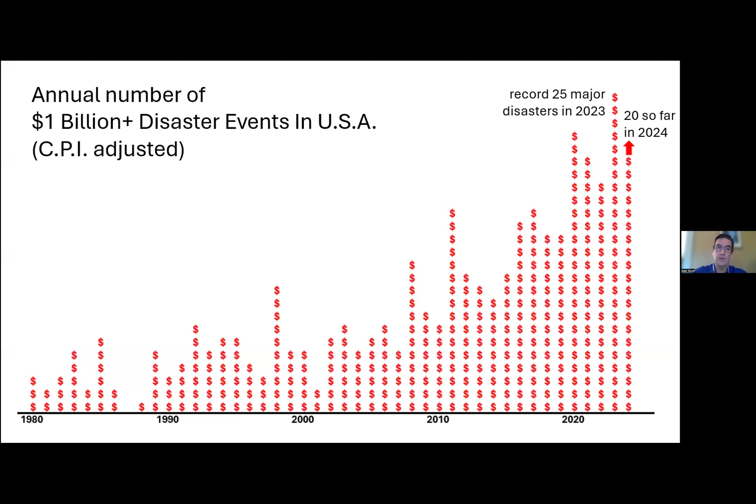Kind of addressing this, many of you may remember in 2019, the AIA announced their climate action plan, which reinforced the commitment that architects should have towards sustainability and resilience, and talking about the necessity of designing for the effects of climate change. And so this is very much part of our responsibility, our professional responsibility as architects.

One of the things that people often get confused by is code. Building code is not the same thing as resilience. I think about building codes the way I think about the frames on modern automobiles. They are designed with crumple zones in the frame so that in a collision, that frame absorbs the impact of the collision, sparing the occupants the worst of the impact.

But afterwards, the occupants hopefully will walk away or only sustain minor injuries, but the car is totaled and needs to be replaced. And so code is a minimum life safety standard, not necessarily focused on resilience to the ability to continue operating after hazard events.

When I think about resilience, I think about it in sort of three aspects that are important in buildings. The bottom line, starting with building safety and security, about keeping occupants safe during and immediately after a hazard event. So building codes do some of this, but not necessarily far enough relative to all hazard types.

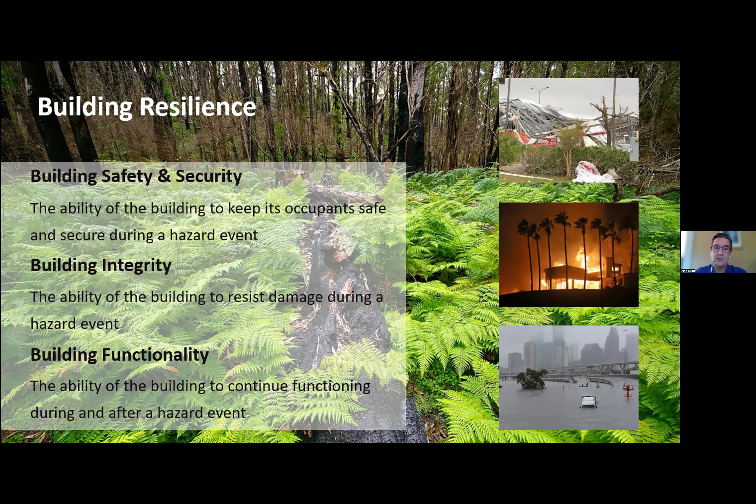Investing in resilience pays. The National Institute of Building Sciences estimates that for every dollar invested in resilience, you save $4 to $11 or more after a hazard event in terms of avoided losses. So there is a return on investment from thinking upfront about making resilience measures in our built environment. And that's both public investment in infrastructure and community, as well as individual investments in individual buildings.

The other thing that I think is important to note, although it hasn't necessarily filtered down to conversations that we have with individual clients, there are significant trends happening that are going to be pushing all of us to be thinking about resilience in the built environment, if not now, in the near future. Banks are beginning to look at resilience risks associated with projects that they lend on. Insurance companies are beginning to look at not just blanket regional hazard estimates, but individual properties in terms of their risk, in terms of whether or not they underwrite insurance for those properties, or how much that insurance will cost.

And maybe most importantly, real estate financial investors are beginning to look at the long-term risks associated with their investments in commercial real estate relative to the impacts of natural hazards and climate change. And so the ability to get projects funded and insured is going to be dependent upon how resilient they are, or what the risks are associated with particular properties and particular locations.

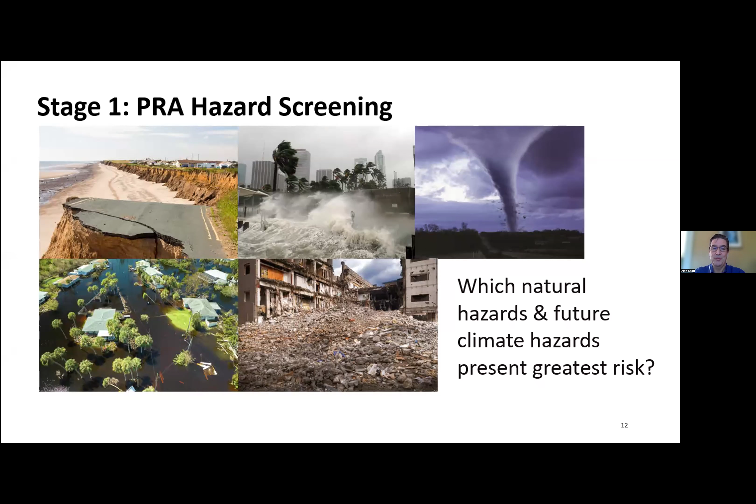I understand that we have actually the opposite thing happening here in the Pacific Northwest. The Cascadia subduction zone, which Jay talked about last week, is actually causing the Oregon coast to rise more or less at the rate that sea level rise is happening. So until that big earthquake happens, we might stay ahead of sea level rise here, but we're going to be in trouble with the subsidence after the earthquake happens.

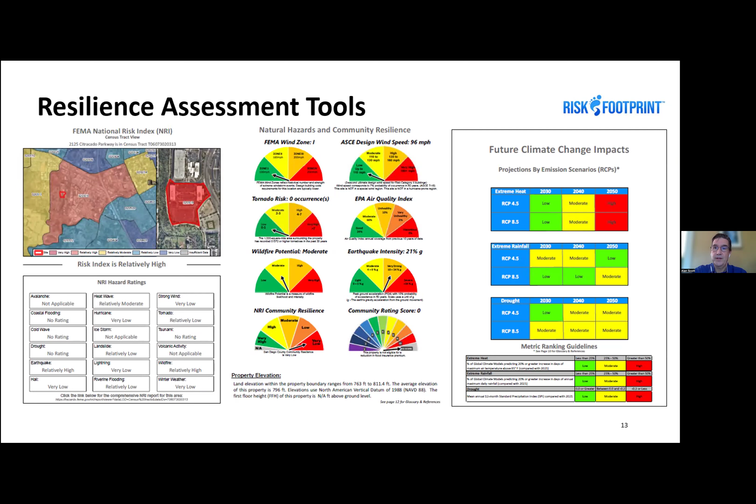When doing that hazard screening, there are publicly available tools like FEMA's National Risk Index and other resources to help with those assessments. And there are also some proprietary tools that help put it all together. And so that assessment looks at qualitatively what are the high, moderate, and low hazard risks of different current hazards, and also uses climate models through the representative concentration pathways for carbon emissions to determine potential for things like extreme heat, rainfall, drought, and sea level rise.

The second stage of that assessment looks at vulnerability, and so vulnerability combined with the frequency and intensity of potential hazards is how you figure out the risk associated with those hazards for a specific location. When we look at vulnerability, we look at the vulnerability of both the asset and the occupants of the building, and not just the building itself. And the factors that go into that include exposure, sensitivity, and adaptive capacity. And just to quickly dig into what those terms mean.

Exposure is what it sounds like. How exposed is that particular location, the building or site, to the identified hazards? And an easy example of this is that a waterfront property has greater exposure to a hurricane than one that's located a mile inland. So that changes the exposure. And interestingly, when we think about sensitivity and adaptive capacity, that has more to do with the type of facility we're talking about and the occupants who will be in that facility.

And a quick way to contrast that is thinking about maybe your own architecture firm. If you have your critical project documents saved on the cloud or in an offsite location, and your staff is able to work remote on laptops, then if there's a hazard that affects your office, you can adapt and continue operating effectively elsewhere while the building is repaired.

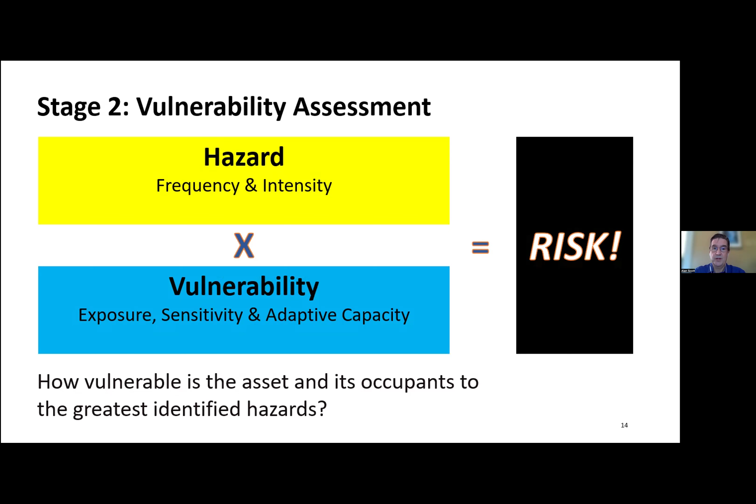The third stage of that assessment is looking at risk mitigation. So identifying of the given hazards and the vulnerability to those hazards, the risks associated with those, what are the physical and operational measures that can be put in place to reduce those risks?

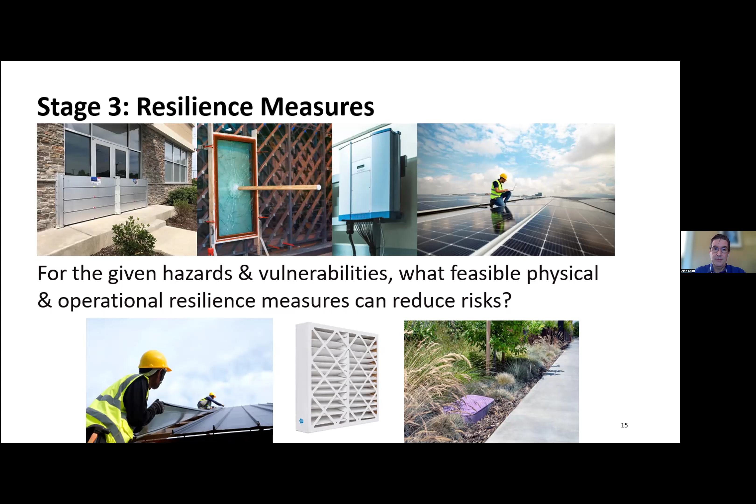And that could be things like flood barriers that can be deployed, impact-resistant glazing in high wind events, having a photovoltaic system and battery backup for backup power, so that you have some continuity of operation, installing more wind-resistant roofing to prevent the severe losses from roof blowing off, having high efficiency filters to take care of wildfire smoke, or simple things like drought tolerant landscaping and water efficient fixtures, so that in a water shortage scenario there's resilience there.

One critical consideration about resilience is that it goes hand in hand with sustainability. So sustainability and resilience are two sides of one coin. Sometimes in the ESG space, this is referred to as double materiality. So when we're looking at climate-related risks, we look at transitional risks, which are risks associated with what your building or your business is doing to Mother Nature, and physical risks, what's Mother Nature doing to your building or your business.

And so there's regulatory aspects about transitional risks that need to be addressed, things like building performance standards that are setting caps on the carbon emissions from buildings in certain municipalities. And then physical risks, again, are looking at things like natural hazards and climate change and those impacts on a building.

I mentioned the voluntary standards as well, and I've been working with the U.S. Green Building Council on integrating resilience into LEED version 5, which will be released next year. One of the key elements is that both for LEED operation and maintenance of existing buildings and LEED for new construction, there will be a prerequisite for conducting a resilience assessment in the case of new construction or major renovation prior to developing the project. So identifying the primary hazards that the building will be subjected to, and how those will be addressed in the design of the project. So that's going to be a prerequisite in the new version of LEED.

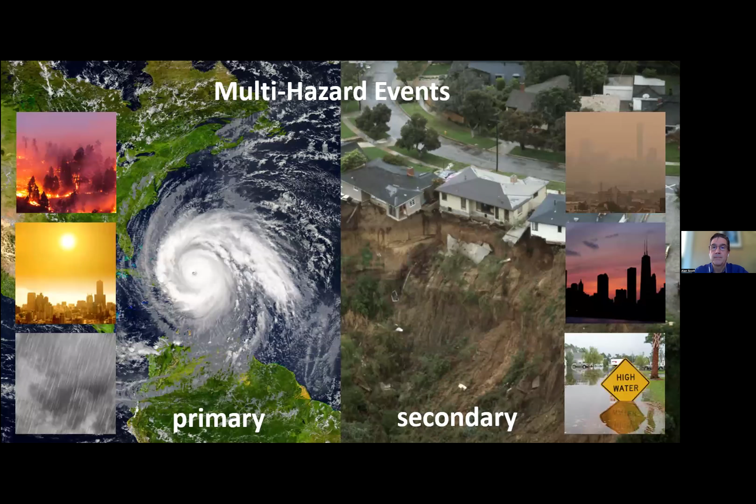Now, starting to talk more specifically about hazards that we need to address with resilience measures, it's important to understand that we're not just talking about one hazard at a time, but in many cases, there are multi-hazard events. So there's a primary hazard and a secondary hazard. A primary hazard like wildfires that affect a specific location, and then wildfire smoke that impacts a much broader area. One thing to note is that secondary and tertiary hazards can be separated spatially and temporally from the initial hazards.

And one interesting example of that came up this year down in New Mexico. 2 years ago, a wildfire in the mountains of northern New Mexico left a burn scar on the hills. This spring, an unusually heavy rainstorm came through and caused mudslides in that burn scar that went into the water supply for Las Vegas, New Mexico. And so because of a wildfire 2 years ago and an extreme rainfall event that you wouldn't think would cause a drought, the city was out of water and had to shut down businesses and was essentially in crisis mode because their water supply was vulnerable and not resilient to those hazards.

Another way to think about that is that hazards are often cascading and compounding from one another. For example, an extreme drought is an acute hazard that we're faced with. Sometimes those droughts occur in conjunction with heat waves. And in those kinds of scenarios, there could be an increased demand for electricity. At the same time, there's reduced water supply, which means that thermal electric plants that rely on water for cooling might need to shut down. That's happened several times in France over the last few years, where they had deadly heat waves because their nuclear plants had to be shut down in the face of a drought and extreme heat event.

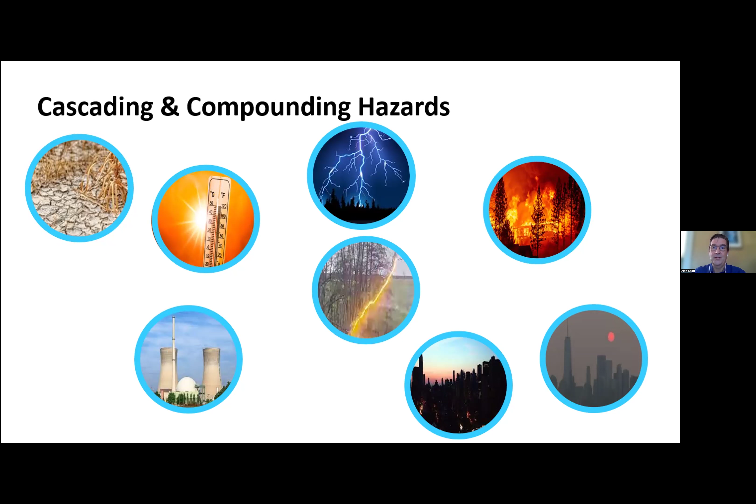Extreme heat events in the summertime can also spawn severe storms with lightning or winds that can knock branches onto power lines, which then spawn wildfires and create wildfire smoke. At the same time, we might have power outages where we can't cool our buildings without opening the windows. So you can see that one hazard can lead to another, and impacts can be widespread and interconnected.

One final note before we dive into the other details: not a day goes by, I don't think, that I hear about our shortage of housing and housing affordability. And so that's a crisis we're dealing with all over the place, including here in the Pacific Northwest.

I don't know whether you saw this study from the Harvard Joint Center for Housing Studies that 41% of our rental housing nationwide is at high risk from climate change impacts. And we can see on this map that there are a lot of areas in Oregon and Washington where that's true. Flooding is one of the key risks associated with that.

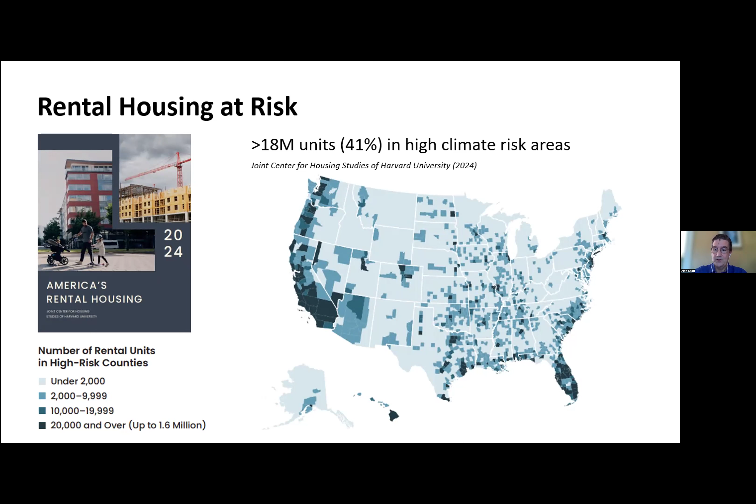So at the same time we're trying to address this housing crisis, climate change might be undermining or eroding, literally and figuratively, our existing housing stock and taking away our ability to address that other issue. So resilient housing is going to be one of the things we need to focus on. So let's talk about water and then wind after that.

And you may or may not know that floods account for 90% of the natural disasters in the US. And overall, flooding is responsible for more of the total damages in terms of loss of life, economic damage, and property loss from natural disasters. And while coastal areas are some of the areas most subject to flooding, significant flooding happens in every state in the United States.

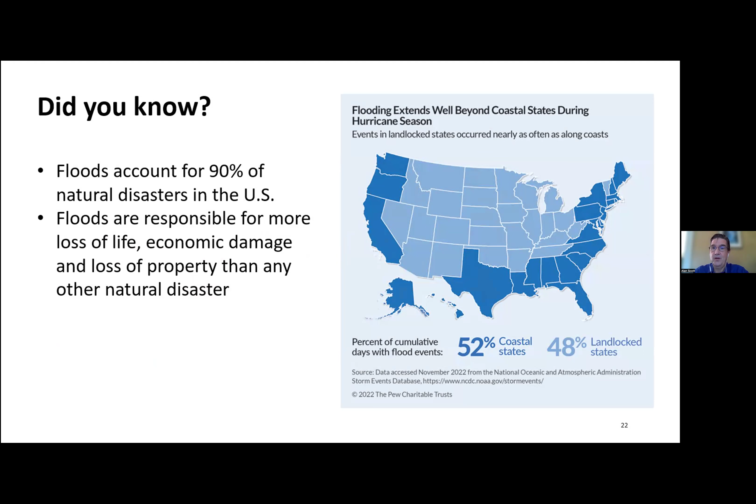Different people have different ways of classifying this, but I want to talk about generally types of flooding. The two main ones that you need to address are fluvial or riverine flooding and pluvial or heavy rainfall flooding. One of the scenarios that's happening more and more down in Florida is sunny day flooding or tidal flooding, where sea level rise and just king tides are pushing tidal water up into drainage systems and causing flooding in streets, even on days when there's no rain around.

And of course, flooding can also come from storm surge from major storms. And wind-driven rain can be a source of flooding in buildings. Back when Hurricane Ida or the remnants of it hit New York City, there were many older buildings that weren't designed for wind-driven driving rain, and there was some significant flooding in buildings in Manhattan and elsewhere in New York from those hurricane remnants.

When we're trying to assess flooding, one of the first places that I think many of us are used to going to is FEMA flood maps. And this is, of course, a good place to start because FEMA is the primary government agency that addresses flooding and helps with identifying risks and helping with recovery. But it's important to note that FEMA flood maps only address riverine or fluvial flooding. They do not address pluvial flooding and the other types of flooding I just mentioned. So you can start with a FEMA flood map, but don't finish with it.

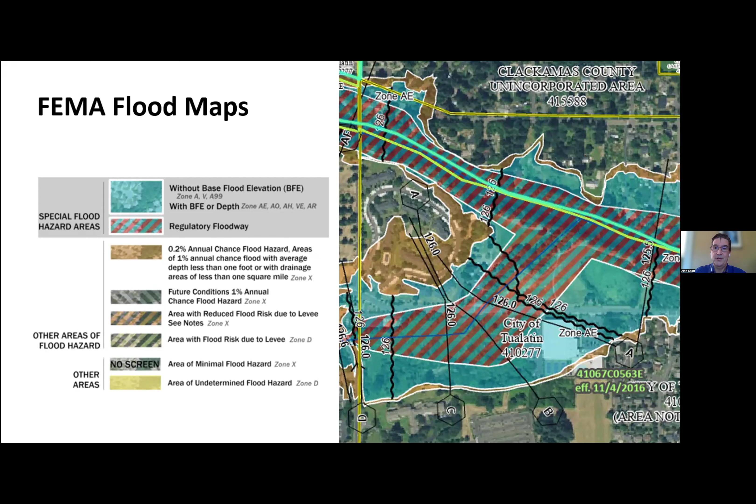And here's just one example of a property. The upper map shows the FEMA flood map showing this particular property in a low flood risk zone. But looking at other resources to understand pluvial flood risks, there's a significant area through the center of the site that has a flooding risk that needs to be addressed in the development.

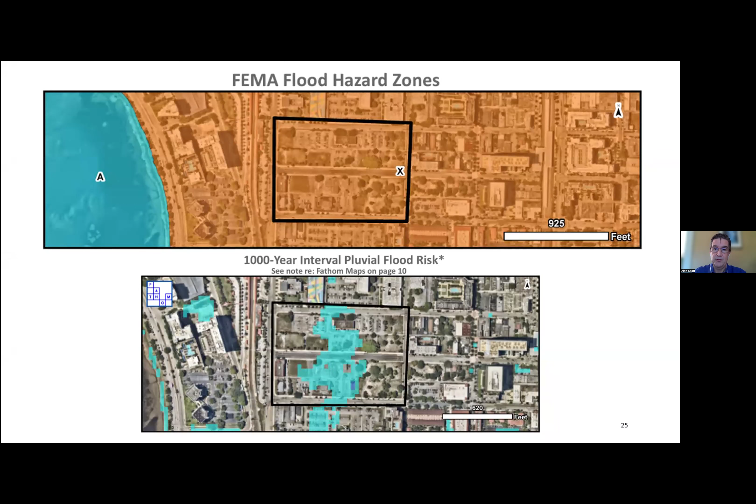The other thing, in terms of terminology around flooding, people often get confused whether it's referring to frequency or probability of an event happening. And this doesn't just include flooding. This can be other storms that are referred to in terms of their return period. So a storm event return period is the recurrence interval. But does a 100-year storm mean that it happens more or less once every 100 years? And that's actually not correct.

It means that there's an approximate 1% annual chance, a probability of an event that exceeds the severity of that particular type of storm. So it's a 1% annual exceedance probability, not to say that if you had a 100-year storm event last year, it's going to be roughly 99 years before the next one happens.

So one way to put this in perspective is that 100-year storm event probability means that there's a 10% chance over a 10-year commercial real estate hold period. So the investor who might be holding that office building for 10 years has a significant chance of flooding occurring or some storm event happening. And over the course of your 30-year mortgage on your home, that's about a 26% chance of that event happening. So it's not insignificant, even though a 100-year event might sound like an unlikely frequency, but it's actually significant.

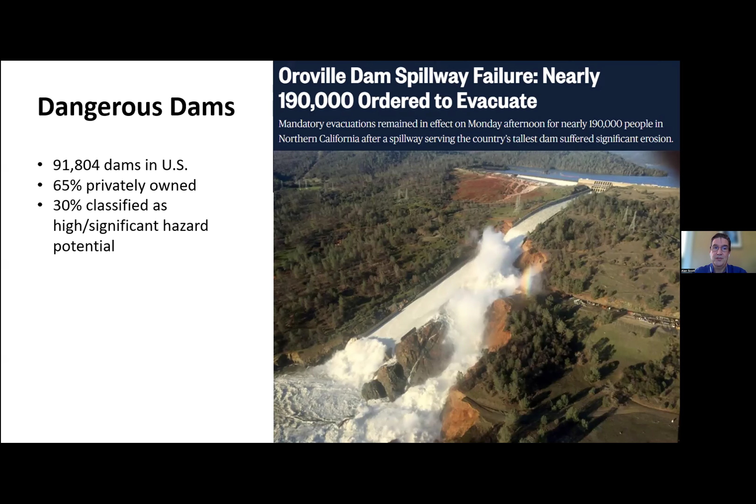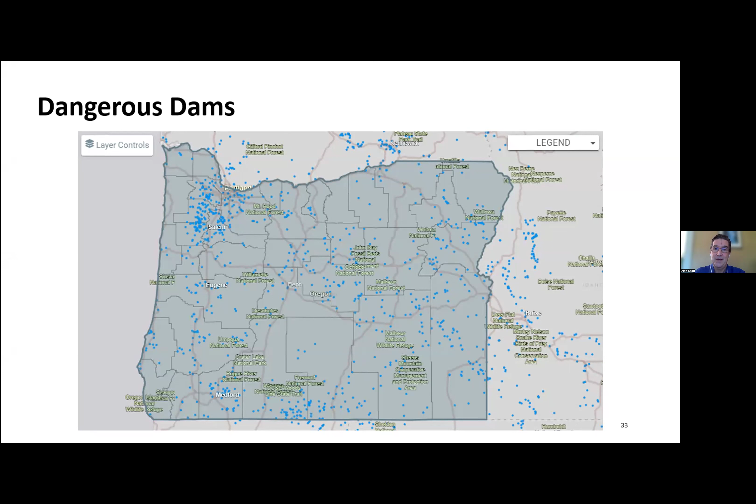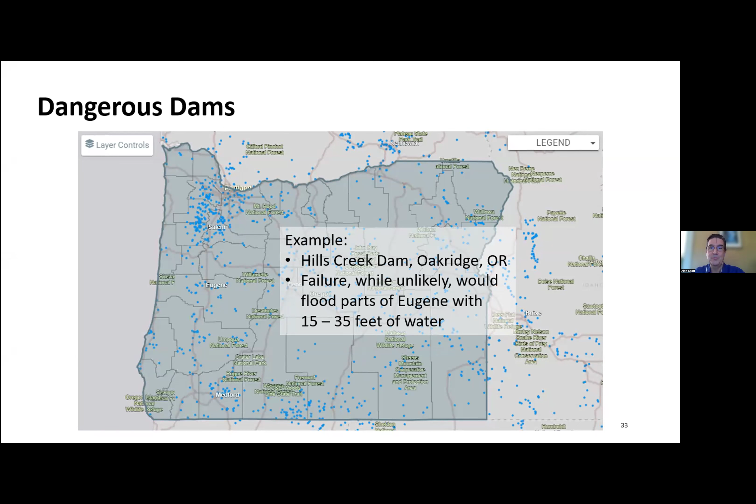And just to put this in a more local perspective, here's a map. Each one of those blue dots represents a dam in Oregon. Not all of those are high hazard. Not all of them are significant, but there's a lot of dams around our state. And statistically speaking, some of them might be at risk of failure. And just to pull out one example, the Hills Creek Dam in Oakridge, Oregon, while its failure is unlikely, if it did fail, it would flood parts of Eugene and Springfield with 15 to 35 feet of water. So, something to consider in thinking about hazards.

So I'm going to shift gears and get into some terminology around flooding and flood-resistant design in buildings to give you some tools to take away in thinking about this. A couple of basic ones: base flood elevation, or BFE, refers to the height of a potential flood risk. In the case of riverine flooding, this is typically determined by FEMA, but one also needs to look for data on base flood elevation for things like king tides in the case of coastal properties, or storm surge from hurricanes or other type events. So base flood elevation could vary, but it's where we start with understanding.

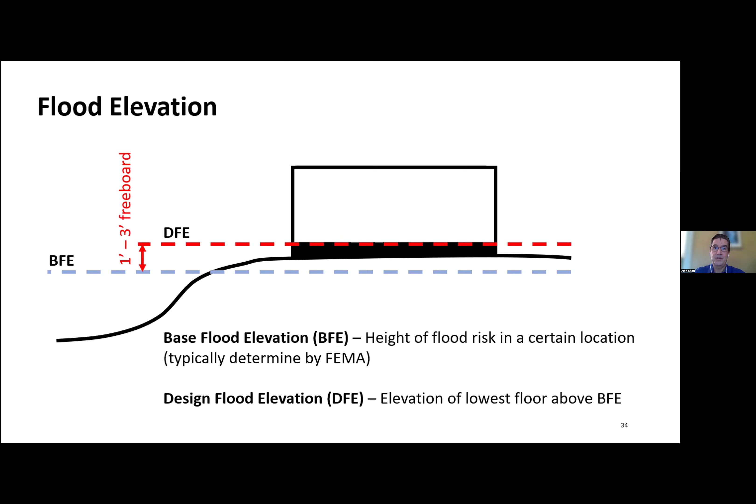And then, of course, design flood elevation, or DFE, refers to the elevation of our lowest floor of the building. And typically we want this to be at least 1 foot and maybe more above the base flood elevation to provide some freeboard, so that there's some space between the highest floodwaters and the lowest floor of our buildings.

When we want to talk about flood mitigation, there's some terminology in terms of the types of flood proofing we might do. I personally don't like the word flood proofing because it implies that it's going to take care of everything and there's no issue. I prefer flood resistance, but flood proofing is the terminology that's used, so I'm going to stick with that term here. Flood proofing can be either wet flood proofing or dry flood proofing, and I'll describe those in a moment, but it might seem obvious. And then flood proofing can also be active or passive in terms of requiring active deployment or being passively deployed. And I'll explain those in a little bit more detail.

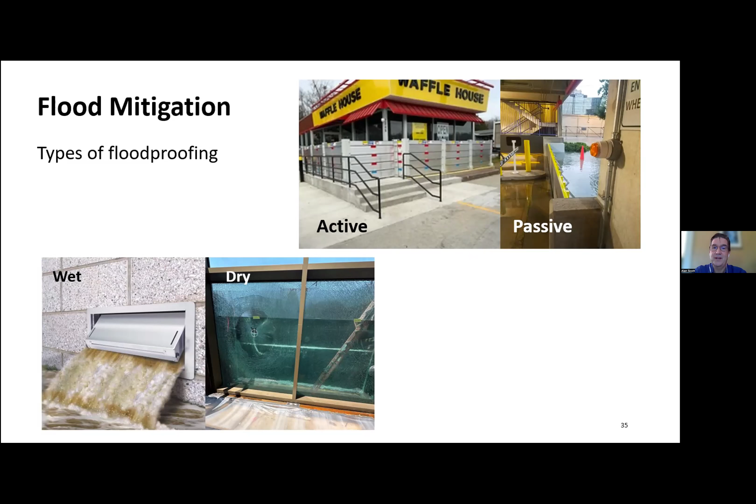While lingering on this slide for a moment, I don't know if you've heard of the Waffle House rule, but FEMA officials use that because Waffle House in the Southeast United States in particular is famous for being open all the time and prepared. And so if a FEMA official arrives after a hazard event has happened and the Waffle House is closed, then they know it's a very severe disaster.

So when we talk about wet flood proofing, flood proofing is designing the building to allow water to flow through the lowest levels of the building and putting flood vents on that lowest level. This allows the water to move through as opposed to moving around and providing scouring at the foundation or putting pressure on the walls of the building and pushing it off its foundations.

So it avoids catastrophic damage to the building, and is less expensive to implement generally than dry flood proofing, but it also requires a more extensive cleanup because those floodwaters, of course, are going to be filled with mud and debris and such, and require some cleanup. So in wet flood proofing, in addition to flood vents, you also need to design the structure and interior finishes to be resistant to flood damage.

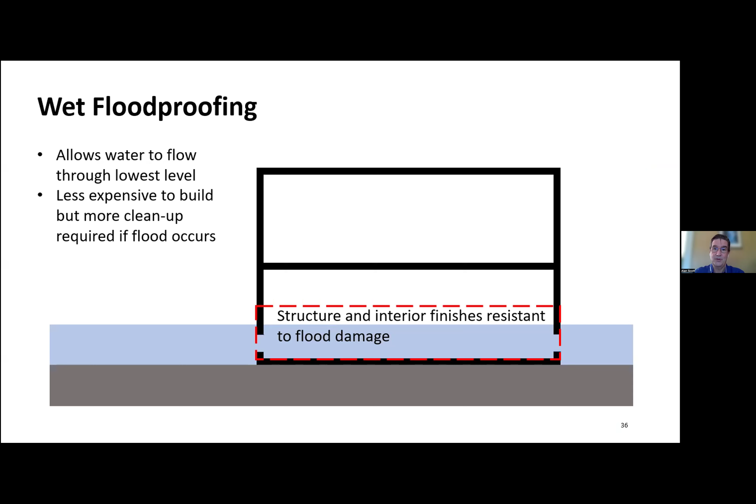And let me be more specific about this. In the case of wood framing, this would mean using pressure treated studs as opposed to ordinary wood, using closed cell insulation instead of batt insulation, creating a break in the gypsum board on the inside to prevent moisture from wicking up the entire wall and then becoming a spot for mold growth. So limiting that flood damage to the lower portion, or thinking about more moisture resistant materials like the CMU block and tile and other materials that don't absorb water and can be cleaned afterwards.

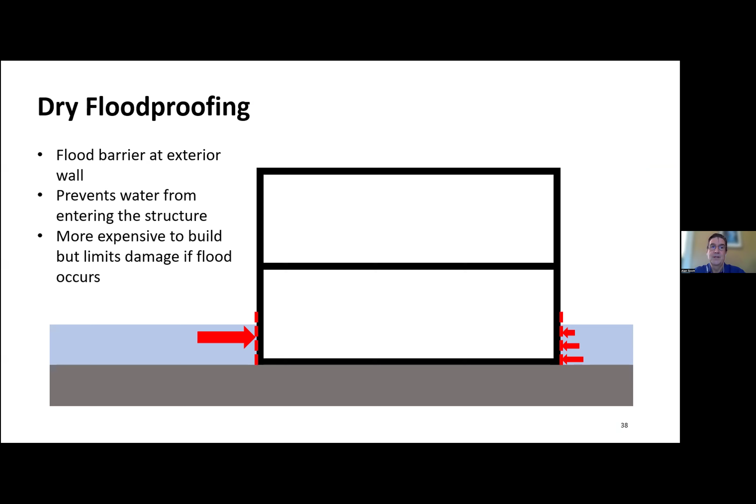Dry flood proofing is when we place the flood barrier at the exterior wall and prevent water from entering the structure. This is a more expensive way to build, but it also limits the damage from the flood. The key piece here is that the exterior walls then have to be designed to manage the hydrostatic pressure of standing water against the wall at whatever height it's expected to be in a flood, as well as dynamic pressure from the flowing water and floating debris like automobiles that might collide with your building during the flood event. So there's some important structural and waterproofing considerations in designing for dry flood proofing of a building, but it certainly is less messy to clean up afterwards.

Dry flood proofing can also be achieved with permanent or temporary flood barriers that surround the building, so you keep the water away from the building and then avoid those issues. So you have those permanent or temporary barriers to keep the flooding away. The key piece here is that you still might have rainfall falling on the roof of the building and the site adjacent to the building. And so it's critical to have auxiliary pumps on backup power that can remove that water, to prevent a bathtub from occurring inside your flood barrier while you're trying to keep water away.

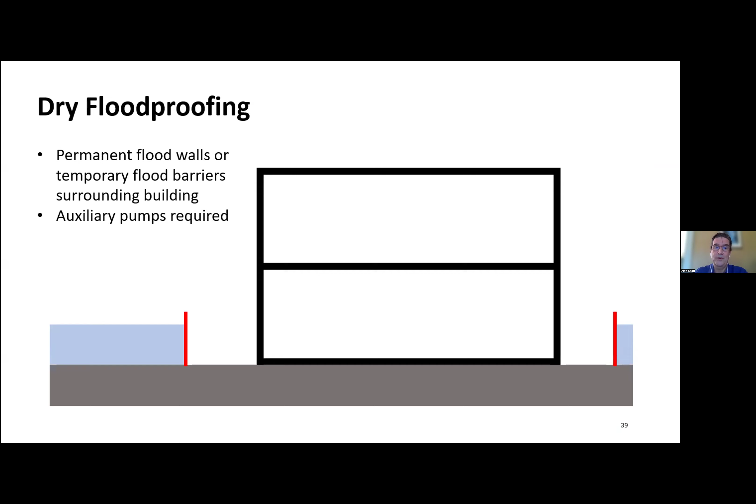The other terminology I mentioned is about active versus passive flood proofing systems. Active systems require storage space on site to keep these materials when a flood's not happening, and they also require manual deployment. So you have a staff available to unpack and deploy these systems before a flood happens. So in this case, there's a disadvantage that in a flash flood situation, you don't have time and warning to get the flood barriers out. And it's critical that people aren't scratching their head at the time of critical nature. So the staff who will be responsible for that need to have regular training on the deployment of those systems.

Those active systems could be things like what they call flood logs, that are these planks that fit into mounting brackets at the edge of windows to prevent floodwater from entering at windows and doors on the building, or they can be temporary barriers that are set up away from the building. Passive systems, by contrast, are either permanent or automatically deploy in a flood event, so you don't need to have the storage space and training.

These are things like pop-up barriers at parking lot entrances or pedestrian gates to structures, so that they pop up in the case when water gets close, or they can be at the building, active or passive systems like flood-proofed curtain wall systems that are now available to install on lower floors of a building that hold back floodwaters and resist impacts from floating debris. The key piece here is that with these systems, you don't want to find out that they're not working at the time of the flood event. So regular maintenance and testing is required to make sure that they're ready to operate in the event of a flood.

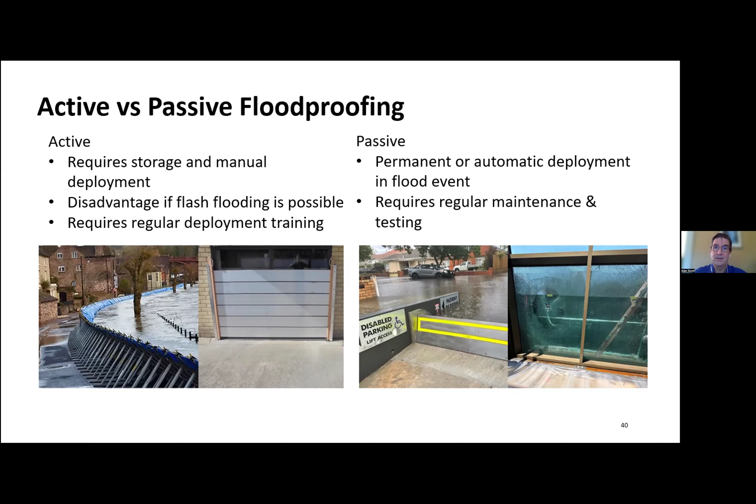The other key piece with flood resilience is elevating electrical and mechanical equipment above the design flood elevation, so that the systems still operate afterwards, and looking at things like flood proofing of elevator machine rooms that tend to be on lower floors of buildings.

In some cases, elements of a water supply might be subject to contamination in a flood event. So making sure that those are adequately protected and having sewer backflow valves to prevent sewage backup into the lower levels of the building.

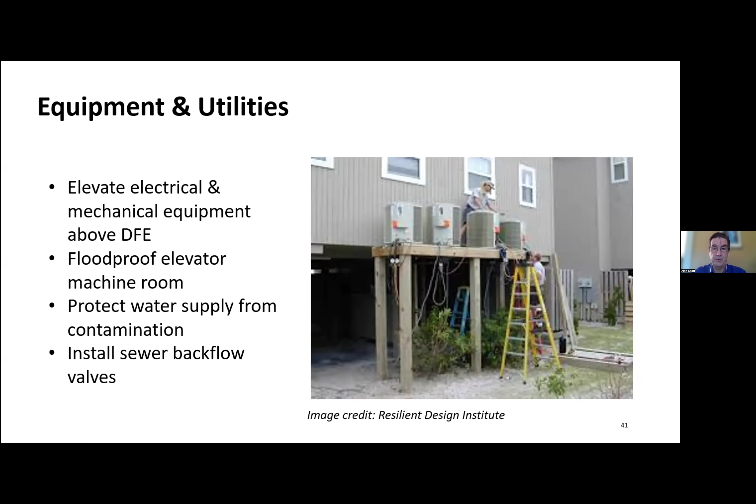I will not go into detail on all the standards, but American Society of Civil Engineers, FEMA, and ANSI all have various standards for design and testing of various different floodproofing elements on buildings. And so these are elements that can be incorporated into your specifications and used for guides in designing floodproofing in buildings.

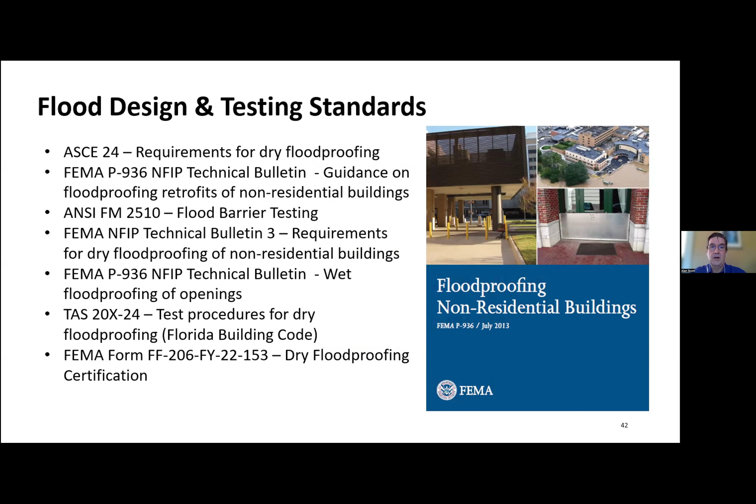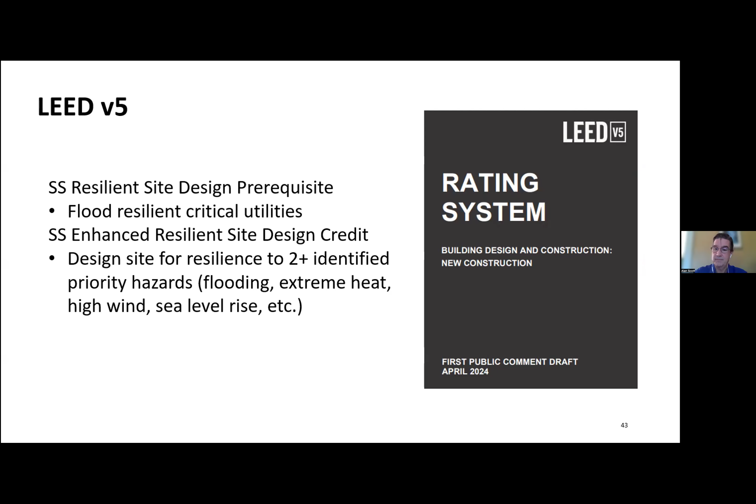So let's move on to talk about wind. A few interesting things. I don't know if you knew that 75% of the tornadoes in the world occur in the US. And a lot of them obviously are in Tornado Alley in the center of the country. Unfortunately, for people in Mississippi, Alabama, Tennessee, and Kentucky, and other places, Tornado Alley is migrating eastward and expanding, so that more areas of the central part of this country are being subject to more frequent tornadoes.

Also, while climate change so far has not necessarily increased the number of hurricanes we have on average, since 1980, the proportion of Category 3 and higher hurricanes in the Atlantic has doubled, and this is likely due to climate change and warming waters.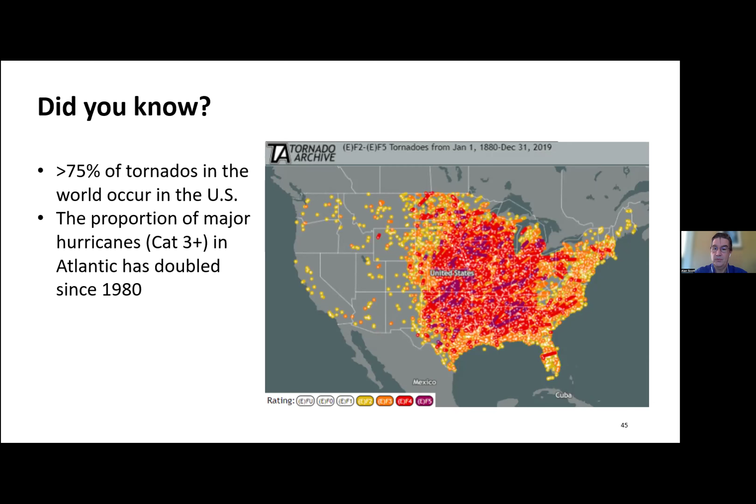But windstorms that we need to deal with in terms of resilience fall into a few categories, and we all know about hurricanes and tornadoes. A derecho is straight line winds that come from a similar source to what causes a tornado in terms of downdraft winds, but instead of being cyclonic, they result in a band of strong winds going straight across the land.

Houston actually experienced a derecho this last spring. It broke out windows in many of the office buildings in downtown Houston. And unfortunately, then a month or so later, they experienced a hurricane that caused similar damage. So they got hit twice by two different types of windstorms.

Straight line winds are more of what we're used to here in the Pacific Northwest, with the winds associated with the boundary between high and low pressure weather systems. And then a haboob is also known as a dust storm. It also comes from thunderstorm activity and downdraft winds, but is accompanied by a wall of dust.

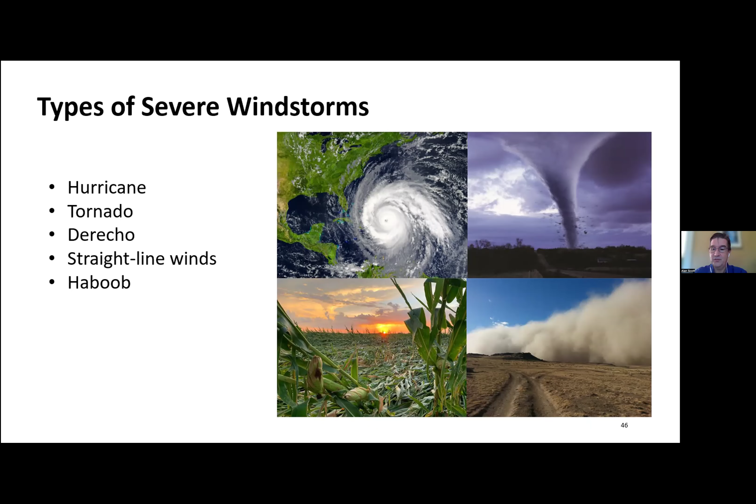And lest you think that the Pacific Northwest is immune from tornadoes just because they mostly happen in the Midwest, we have had a not insignificant number of tornadoes in this region over the last half century, including, some of you may remember, in 2016 there was an EF2 tornado that hit Manzanita and caused significant damage there.

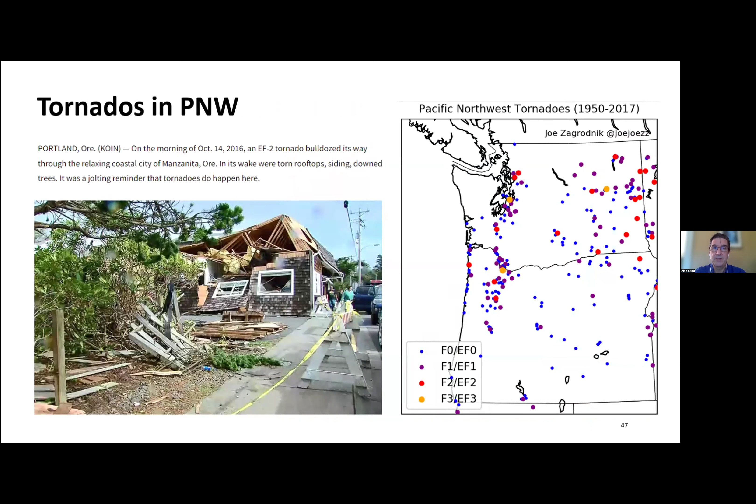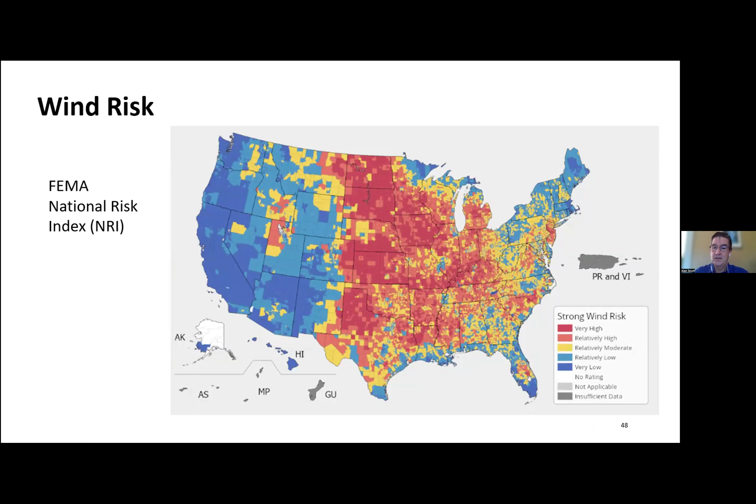When we talk about wind in general, we can look at several resources to identify where risks are. FEMA maintains the National Risk Index and provides this wind risk map that generally coincides with things like Tornado Alley. But we have some lesser but important wind risks here in the Pacific Northwest, and some of those have been getting worse.

The key element that many of you might be familiar with already is the ASCE 7 standard, which talks about wind zones and design wind speeds for locations. The key thing I want to emphasize here is going back to the code comment. These are design wind speeds that are a minimum standard for a location, and perhaps because of changing conditions and greater severity of events, it's prudent for us to be thinking about designing for higher wind speeds than the minimums identified in ASCE 7.

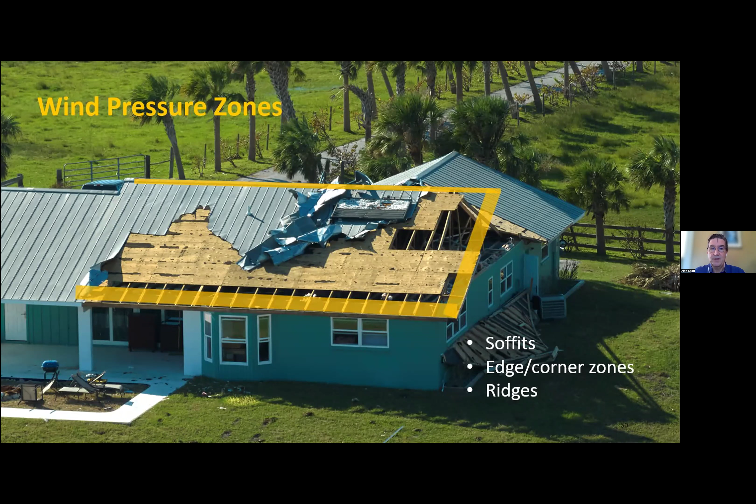When we think about vulnerabilities on a particular building to winds, we need to understand where the wind pressure zones are, and these are generally at soffits, edges, corners, and ridges of roofs, the primary areas of vulnerability. And a key element there is that when a failure happens at one of those locations, it then cascades and causes a greater failure across the entire roof system.

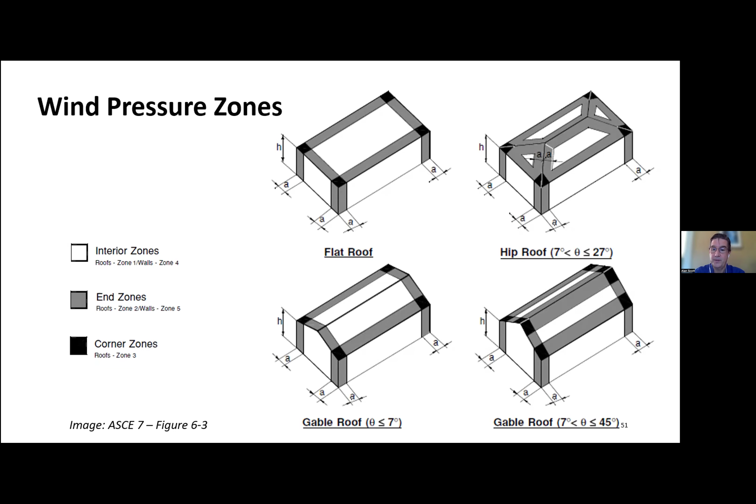ASCE 7 identifies those wind pressure zones for different roof types and structures, and also identifies where those pressure zones are on buildings. So focusing on those edge and corner zones is a critical piece, and I'll come back to specifics on that in a moment.

In terms of designing for wind resilience, think about some basic things like taping panel joints on roof sheathing, especially in wood frame construction. A key element here is this reduces the risk of wind pressure pulling at the joints between those panels and causing sheathing failure. And if the roof above the sheathing fails, then the sheathing and the tape act as a secondary roof to prevent moisture from getting in the building in significant quantities.

But better still, one of the strategies that I like is looking at self-adhered membrane roof underlayment, so that you have a second roof. If there's a failure in the primary roof system, you've got a second means of keeping moisture out of the building, which compounds the impact of wind with water and creates significantly more damage in the structure. But a key piece in that, going back to those wind pressure zones that we just talked about, is upgrading roof attachment systems in those high wind pressure zones.

So instead of going with minimum spacing of attachments, think about closer spacing of attachments in those high wind pressure zones, so that you reduce the potential for a cladding failure. And one final note on roofing and cladding is that soffits are one of those weak points, and so reinforced soffit cladding is critical.

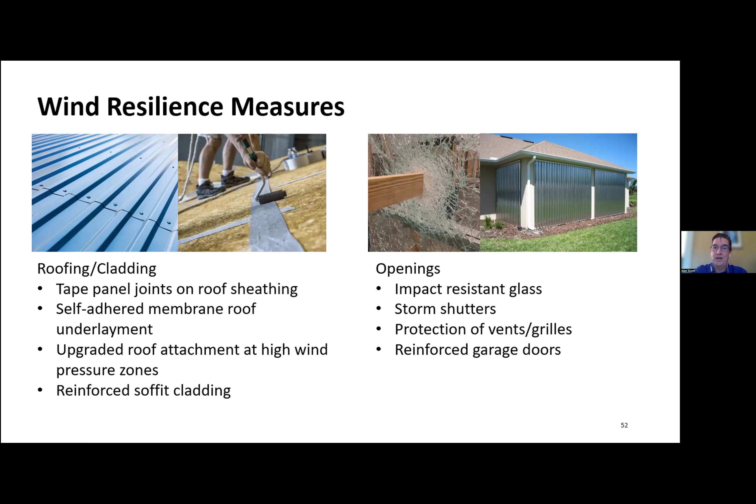It's important also to think about vents and grills on the outside of a building, because they're a source of both failure as well as wind-blown rain pushing water into a building. So consider resilience in terms of the placement and specification of those. And especially in residential construction, garage doors are a key point of weakness. Many houses that are destroyed in tornadoes and some hurricanes happen because the garage door fails first, and then the house gets pressurized and the roof gets blown off. So having reinforced garage doors is the key resilience element for wind.

In terms of structures, ensure that you have a continuous load path to tie together the structure from roof to foundation to resist those uplift pressures from wind. And then don't forget about roof-mounted equipment that could blow away, which makes it difficult for the building itself to function later, but that equipment can also damage other elements of the building. So have reinforced tie downs of equipment on the roof.

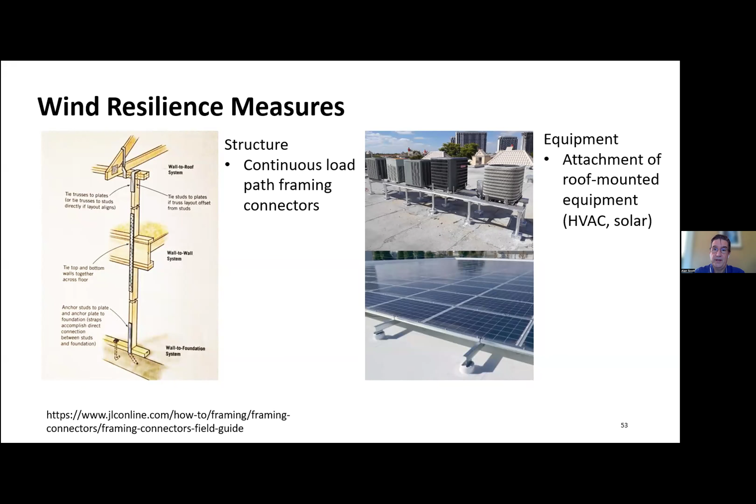Another key element, especially when it comes to things like tornadoes, is that it's possible to design buildings to resist EF 0, 1, and 2 tornadoes, but it's difficult to design for an impact of an EF 3 or higher. But we still want to keep the people inside the building safe. So designing safe rooms is an important element, and FEMA has some standards for designing those safe rooms. But in the absence of the ability to put in a safe room, FEMA also has their BARA standard, the best area of refuge. This is the thing to consider when an owner is not necessarily ready to jump into designing a full safe room in a high wind hazard zone. Making an area of refuge is a critical safety feature.

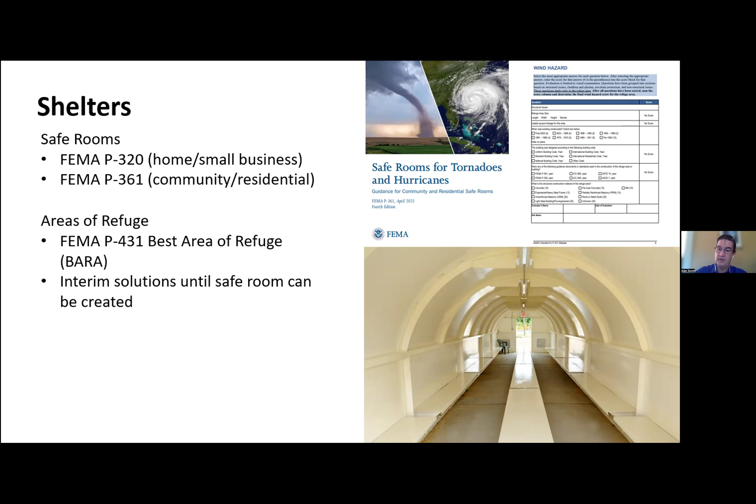Just to close out this section, LEED version 5 is including a resilient spaces credit, which talks about various different building hazards, and a couple of the options included if these hazards are present are designing safe rooms or areas of refuge for high wind events. And then harking back to our discussion of earthquakes last week, going beyond structural resilience for earthquakes, and also making sure that furniture, equipment, and other things are not obstructing egress.

Finally, I wanted to close out and talk very briefly about heat and leave still some time for answering any questions. Extreme heat is a significant hazard that is increasing. Extreme heat actually kills more people globally than any other weather-related disaster, and the frequency, intensity, and duration of heat waves has been steadily increasing since the 1960s.

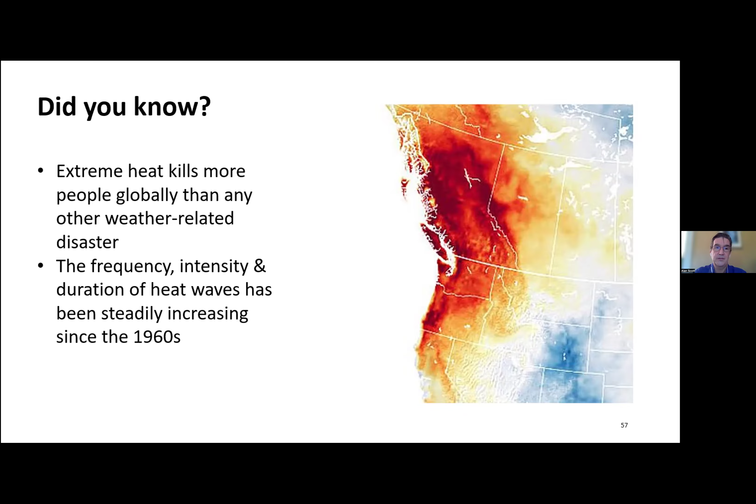And we all remember our heat dome here in 2021. And last summer, we were spared, but much of the rest of the country experienced extreme heat for extended periods of time. So significant impacts on much of this country and the rest of the world.

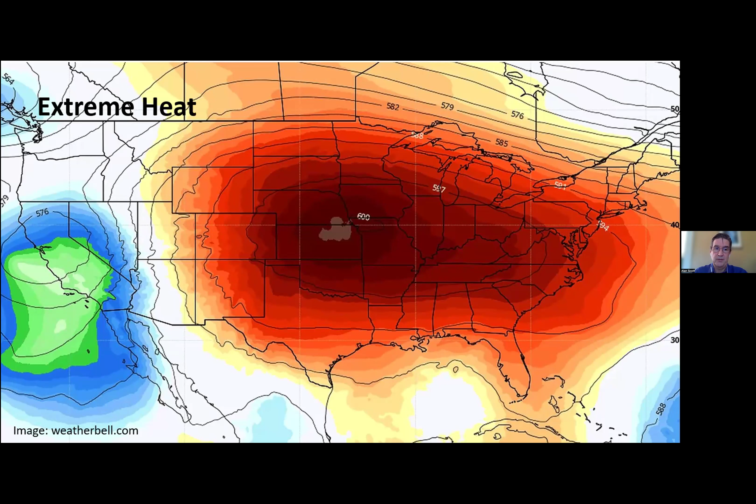When we want to think about designing for thermal resilience, it's pretty self-explanatory, but measures like cool roofs or vegetated roofs help to make our buildings more thermally resilient. A big element is enhanced enclosure design, so higher insulation values and lower infiltration, or simply put, designing with passive house standards in mind is an important element of thermal resilience.

Of course, exterior shading to prevent heat from entering through windows, designing to allow for passive ventilation and night flushing so we can cool off structures at night, and designing for tree shading and reducing paving and using reflective paving. So I think a critical element here, going back to my discussion about multi-hazards at the beginning,

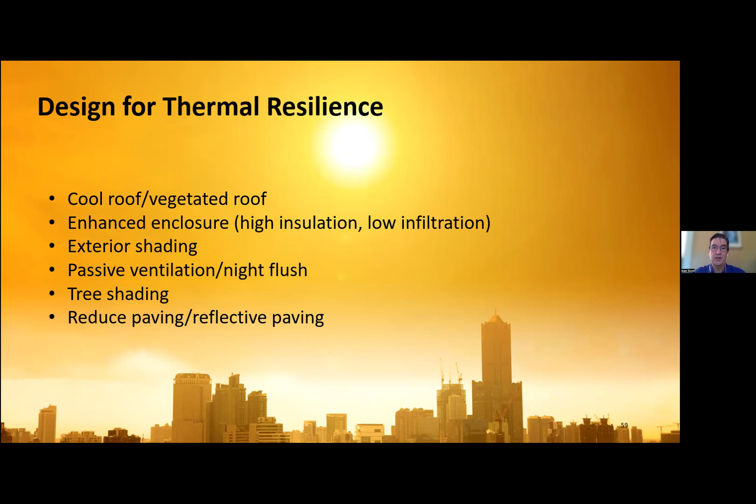extreme heat often coincides with power outages, and so we can't just say we're going to install more air conditioning to deal with that. We need to design for thermal resilience to reduce reliance on air conditioning and be thermally resilient in a heat wave combined with a power outage.

I want to quickly note, thanks to Bora Architects and Tui Lee and Corey Squire with Bora, who produced this really insightful study about thermal resilience, focused on a multifamily housing project, and tying it back to the heat dome in 2021. They looked at thermal resilience in 3 different scenarios: a baseline scenario with a standard code compliant building and no occupant engagement around night ventilation.

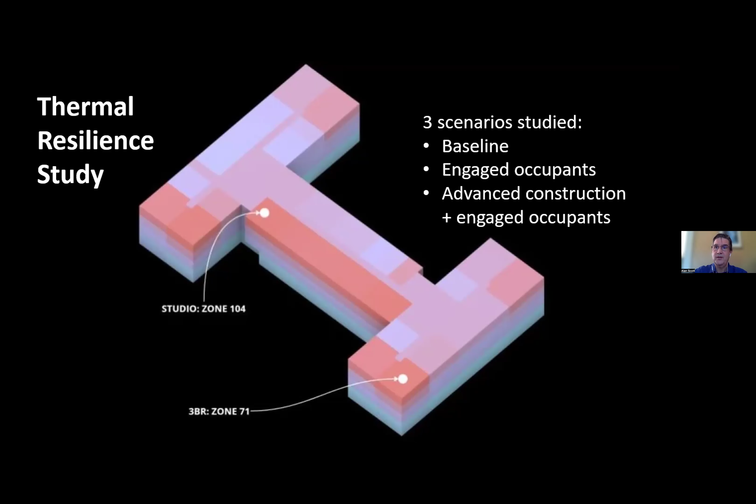because of the building not cooling off. Whereas if the occupants were instructed on how to lower blinds during the day and open windows at night, we reduced that impact in the danger zone down to just 3 days during the heat wave. But then if we went further and used passive house standards as well as night flushing, we only reached the danger zone of temperature for part of 1 day. So a significant impact in building thermal resilience.

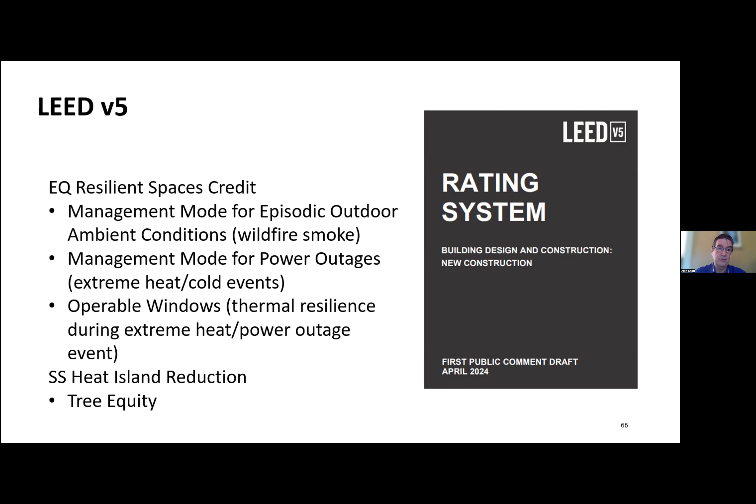In a final note on this, LEED version 5 is incorporating some other resilience-based requirements, looking at management modes for wildfire smoke, management modes for extreme heat and cold events, and operable windows also for extreme heat events and power outages.

So I just want to close our discussion talking about our duty as architects. We have an important role to play in terms of designing for resilience. And I think many of you might know that it's now part of the architect's standard of care to inform our clients about the impacts of climate risk on the projects we design for them.

HGA architects produced an interesting study last year showing that not enough architects are actually paying attention to climate projections in their designs. The AIA, with the help of HKS architects, developed the Resilience Design Toolkit that was released last year, and it provides a great step-by-step discussion of how you can take your project teams and the owner through resilience from start to finish on a project.